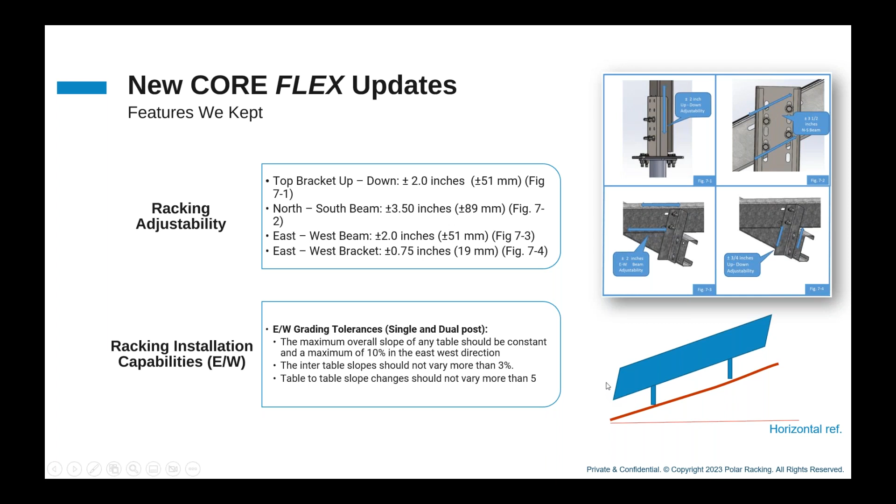Continuing with the features we keep from our system, leading edge tolerance. It's very important to understand that when we talk about leading edge tolerances, it's the average leading edge. We're not looking at the largest or the shortest distance to the ground, but an average throughout the table. And we maintain that tolerance plus or minus 100. The feedback is that that's plenty of adjustability as a tolerance on that feature.

Racking tilt, we're also keeping the traditional 30-degree tilt. The reason for this is very important: you have a steep enough angle that you can shed snow and minimize loading on your system and your foundation, but not so steep that you catch too much wind from the back or the front.

So it's a good compromise performance-wise for the latitude where we are. 30 degrees is very reasonable, and like I said before, a good balance between snow and wind, keeping the loads at a minimum.

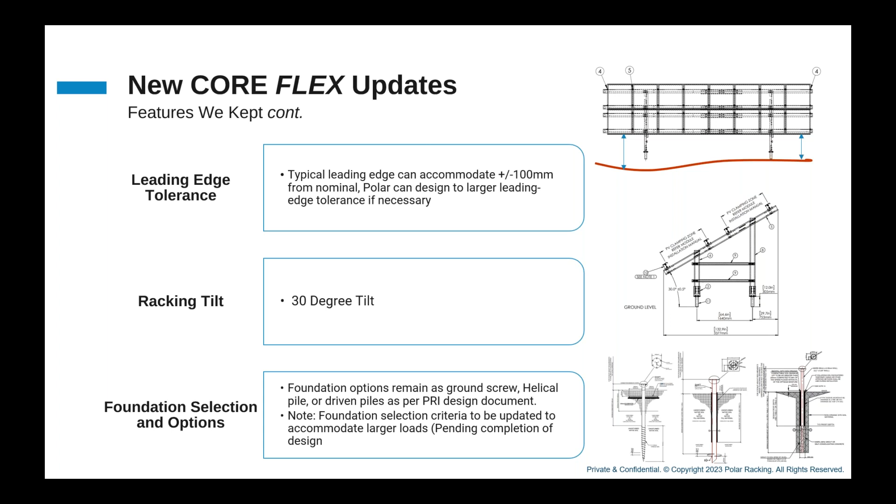Foundation selection. We'll dive in further later on, but basically we can tie to any type of foundation, which means we can work on any type of soil we encounter as we develop a project. Ground screw, helical pile, driven post, grouted post, that's all available, and we maintain the same range as we did before. Next one, please.

So here we're stepping into what's new. Those who have installed this system will probably recognize some of the feedback given to us that we incorporated here. The first change is a top clamp with integrated bonding and grounding. So there's no longer a need to handle that additional bonding washer, just attaching the clamp. It's rated and certified for that purpose, and certified with this system. So all your grounding is taken care of from the module point of view through that method.

Smaller splice bracket, that seems like a small change. But the previous version of the splice bracket was longer, more cumbersome. There was some feedback in terms of aligning during installation. So basically what we did here is adopted the bracket that we use on another product line or core line for utility mount system, utility scale.

You're still coming through muffled. Sorry, I don't know. I'm not sure why that is. Okay, let me see if I can reset my audio for a second. I'm gonna change the audio here.

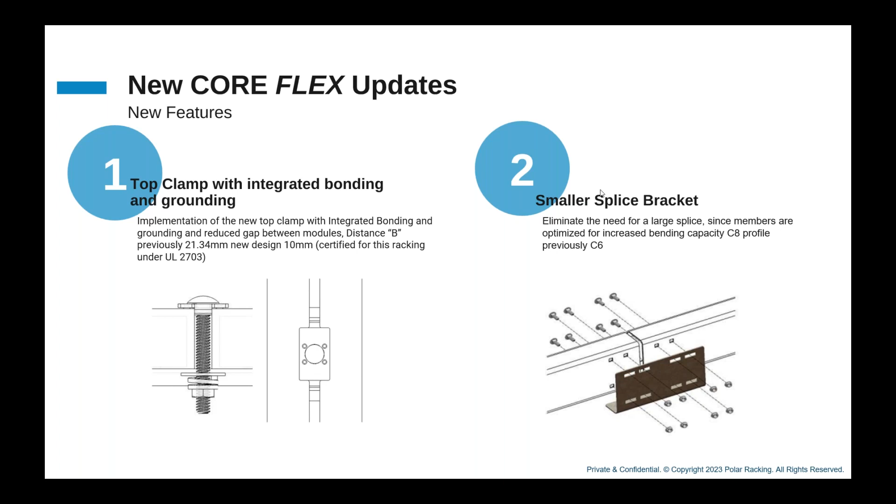Sorry guys, is the audio any better now? Much better? Yes. Okay, hopefully it'll stay good for the rest. Okay, so let's go for the next. Apologies for that, but if there's any further clarification, we can always go back and clarify if needed. Right, this is to continue.

I guess this is yet another very important point on the change, and has to do with module width and length, right? To take on the larger format modules. So for these, we're expanding the width to 1160, and on the other slide we can see the overall height for the module to 2600. So this will allow us to tackle all the new format 550, the 500 watt range modules.

For these, basically we did a bit of a study and looked at everything that we quoted in the last year and a half, with particular attention to all those larger formats. The most common is the 2.2 meters by 1.1 meter. So that's the number that repeats the most, and we certainly make sure that we can capture that.

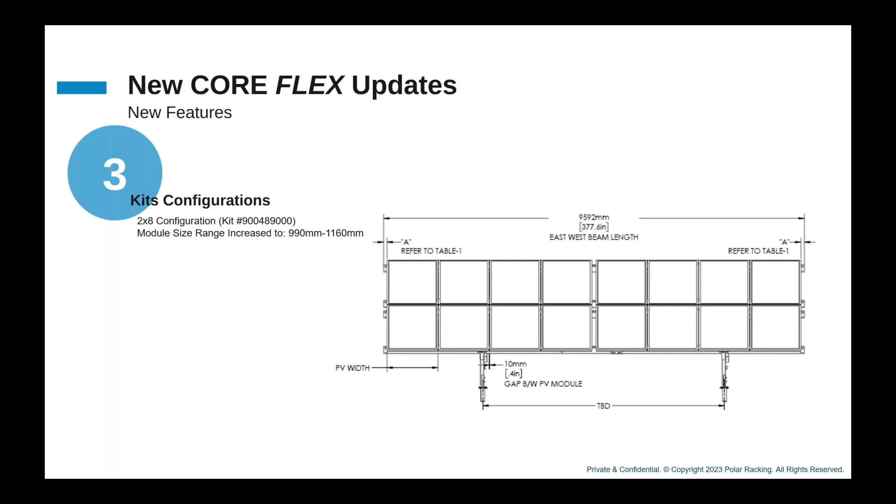There's a few odd module sizes way beyond these dimensions that we're not capturing here, because it's very small usage. I mean, we can count on the fingers of one hand how many jobs we've done with those extra large formats. There's some particular challenge on that in the industry. The normal trend is more towards the 2.2 meters by 1.1. So basically with that, we're ensuring that 80-90% of the modules available today on the market can fit on this product line. Next one over.

Yeah, so additionally, because of the larger formats, we have to increase adjustability features on our rails to account for distances in between modules, and also, very important, for the green zones for clamping on the modules. So on the north-south, we're adding additional adjustability, so you can adjust all your east-west to find a proper or approved range for module mounting. So you will not have issues with the module manufacturer warranty that way.

That's a very small feature, but very important. Like I said, when it comes to module warranty, you want to make sure that you're always in the green zone as per the module manufacturer. And the other new feature is going to be the single post conversion kit. Up until now, like 90% of our sales on this product line is dual post. Now we have a single post kit solution that we're going to launch with this new product.

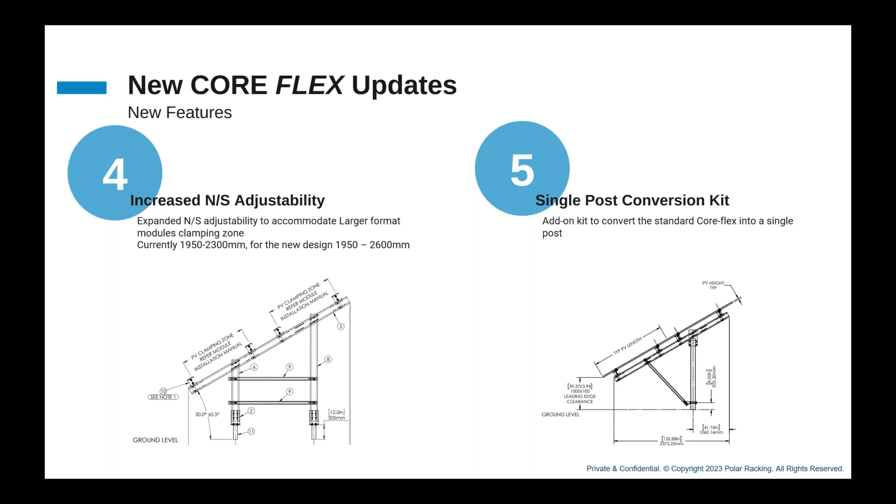So basically, your foundation extends above ground, typically a helical pile or a driven round post. There's some bracketry that connects to the top with braces, and the top table is the same. It's the exact same. You just replace the two legs with the single leg with the braces. Next one. I think at this point I'll hand it over to you again, Chris.

Sure. Guys, we have a couple of questions here, if that's okay. Yes. How big of screw pile posts will be needed for your 2x8 frames? In terms of diameter, we're typically looking at 5.5 inch diameter. And they're asking, will this support 550 watt modules? I believe that's a yes. 1134 by 2285. Absolutely, yes.

And when will the conversion kit be available? We're estimating to wrap everything on the engineering side by mid-April. So I would suppose that shortly after that we'll start the distribution. Great. And do these work with bifacial modules?

Yes, all our racking systems work with bifacial modules. It's important to note, obviously, as opposed to a tracker, there will always be some shading. The bifacial will really rely on diffuse light. So even though you have rails on the back, you don't have 100% exposure. You still have the benefit. You still get the gain of that bifacial module.

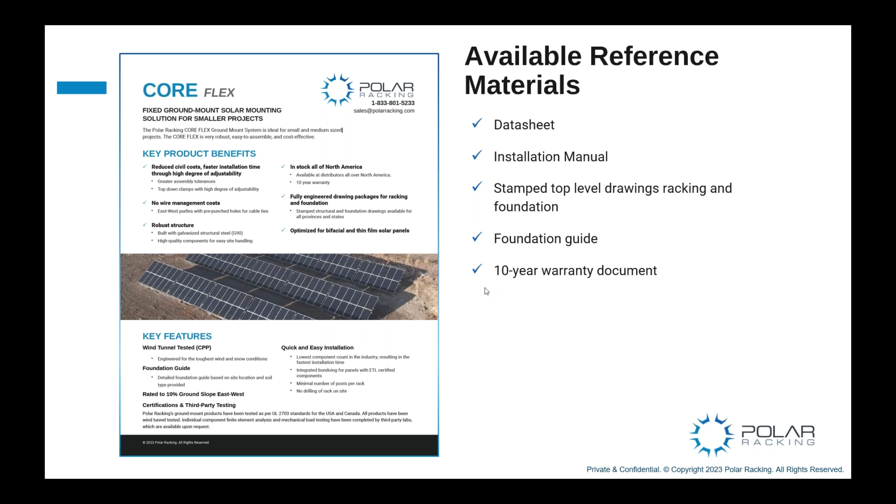I'll just continue on here. Here's some of our tech specs, just a quick run around. We have a 10-year warranty, not really inclusive of corrosion for saltwater environments, but nobody's is. There are things that we can do: for bigger sites, increase the galv thickness, and for smaller sites, just like Mariano said, you can fit it into your O&M schedule. This is all available through BayWa, myself, our website, whatever you need. So I'm not going to spend too much time repeating information that we can all read.

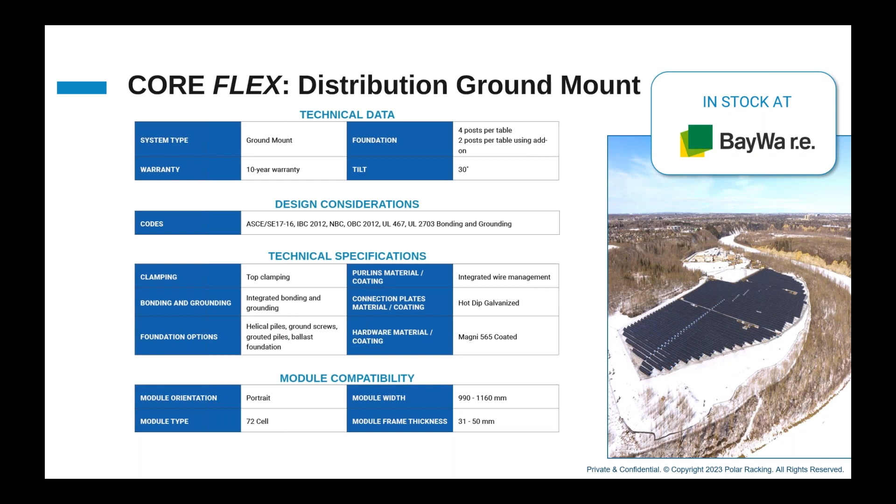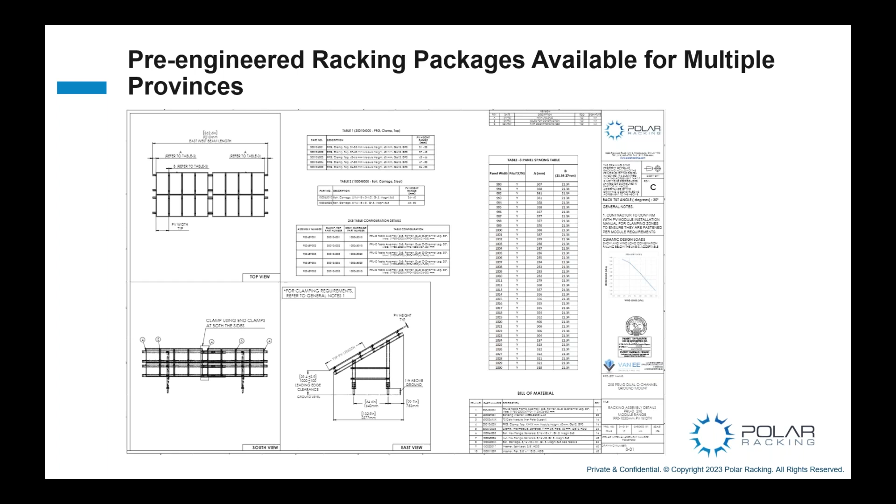This is just an example of what our pre-engineered drawings look like. These are readily available from anybody on this chat, and especially from your team members over at BayWa. So, a small overview just so you understand what we were talking about with the east-west beams, the brackets and clamps, the north-south beam, all of it. It's all there. It's pretty straightforward. There's not a whole lot to this.

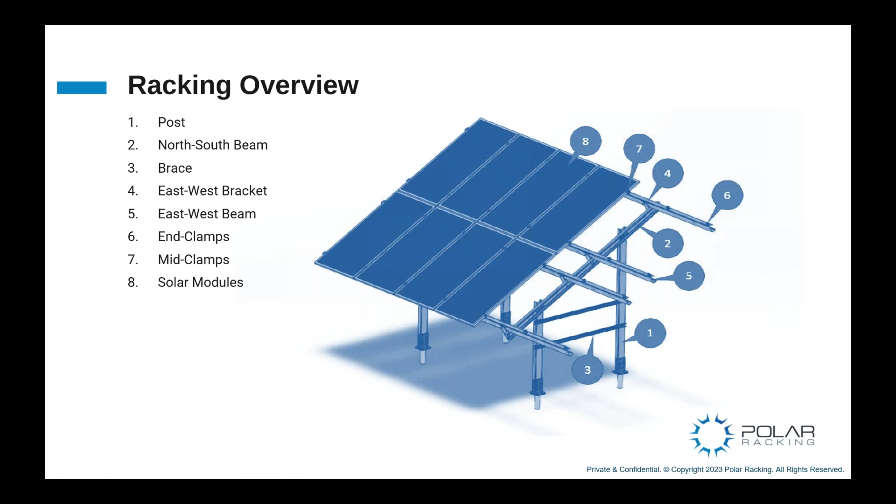Again, this is a very high quality system that doesn't require a lot of maintenance, is very strong, tried and tested, especially in Canada, all over the place, as well as in the upper northeast of the US and in the Caribbean. A ton of this in the Caribbean, which I am forever jealous that I'm not the sales guy for the Bahamas area.

Okay, foundation details. So here are some of the foundations that we have used in the past, that the engineering is available for, as well as the supply through BayWa and through Polar. A lot of this information coming up is going to be very heavy and way over my head as far as the actual math behind it. However, it's all taken care of in our foundation guide, which again, nobody else has. So that's an advantage. That's a big attaboy for Polar.

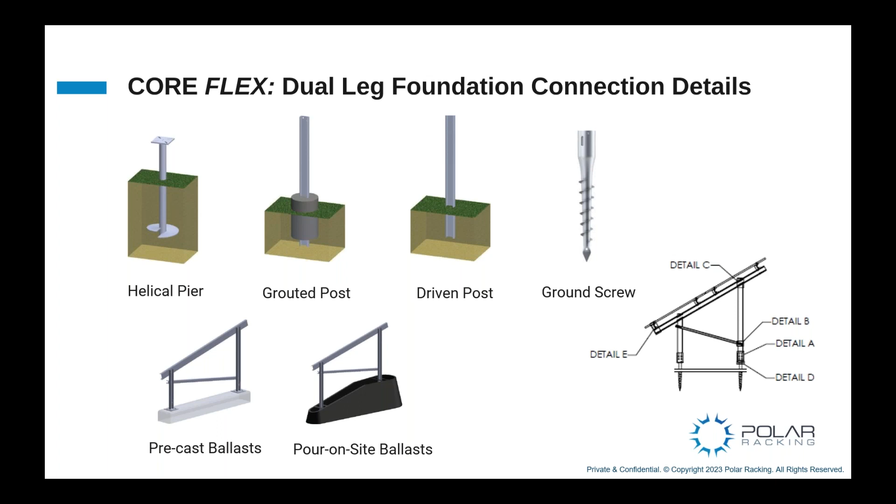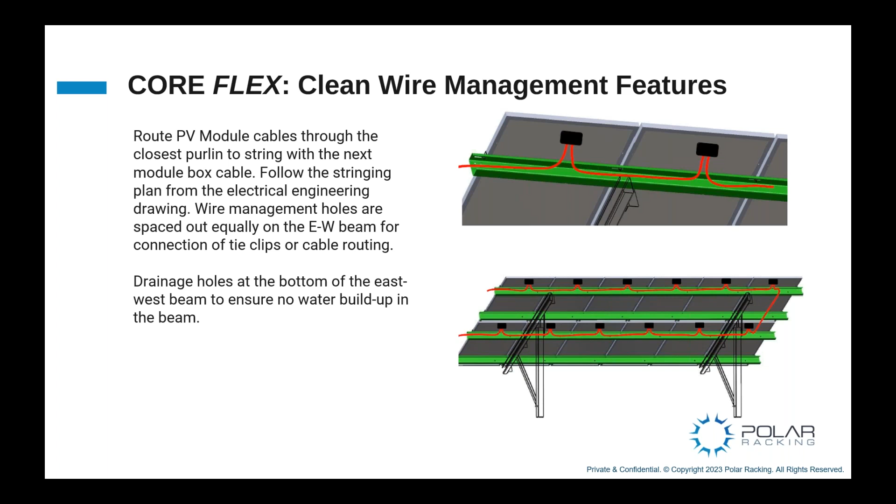We have a very easy and functional wire management system with holes in our purlins for cable ties, cable management, as well as drainage. So it's a pretty no-nonsense system. If the guy that you've asked to install this can't figure out the wire management features, then you should probably have a stern talk with him.

This is where we get into what would be the particulars in our foundation design manual. We take into consideration pretty much everything that you need to build an appropriate foundation for what you're doing. Everything from micropiles, helicals, ground screws, driven round, pour in place, ballasted, a whole bunch of other stuff. We include the snow and the wind loads,

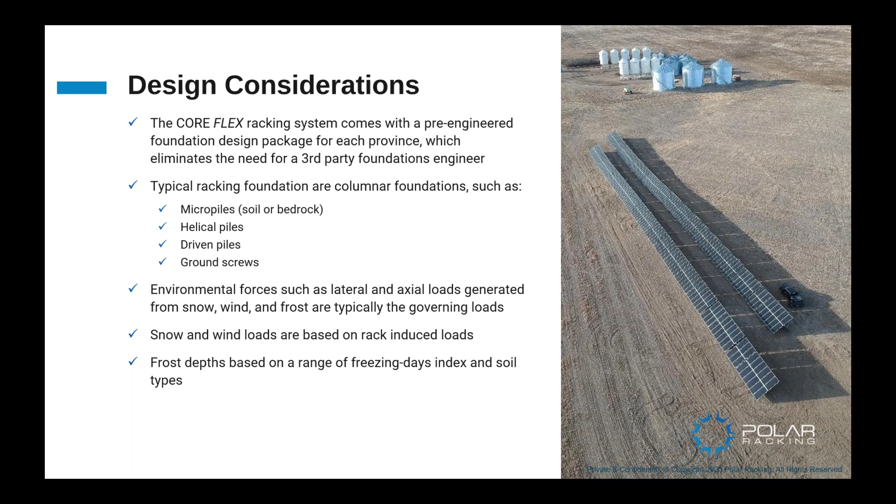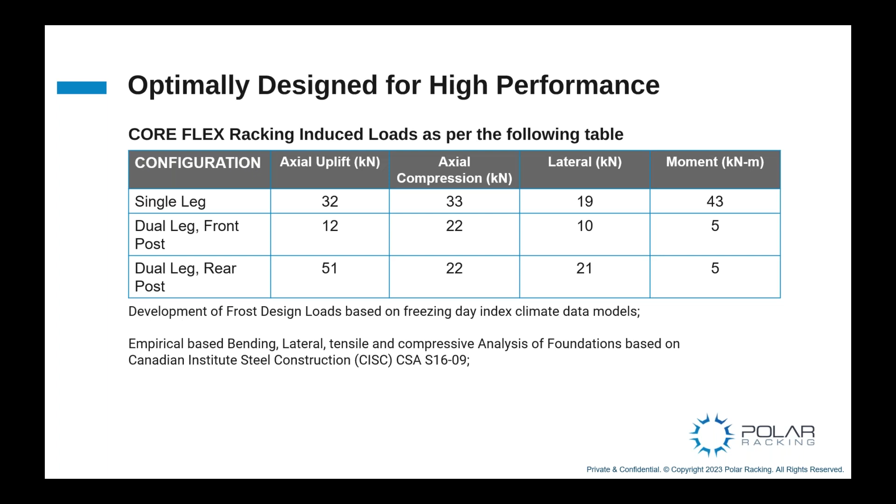and then the guide shows you how to determine the frost depth, which if you're not from Canada, or at least a small section of the northern United States, then you have no idea what it is, fortunately. Just a table full of math. All of this is in the guide, and all of this leads you to a very simple conclusion on what size of pile you require and what loads you're going to incur.

Pincher Creek, too windy. I went to school in Lethbridge. I had to deal with it. You come out of your house leaning one way or the other. So in Pincher Creek, it's too windy, combined with the amount of snow they get, for our racking.

There's not many places in Canada that you cannot use this racking. I would say probably 97% of areas in Canada are acceptable to use the Core Flex system. The remaining 3% cannot, and those can be covered by our Core fixed tilt system. Again, if this site is over 500 kilowatts.

All of this information is readily available. We pull this from the Alberta Building Code, and it's updated as often as the building codes are, so never. Just kidding. No, this is all based on the 2015 or 2019 building code for wherever your jurisdiction is.

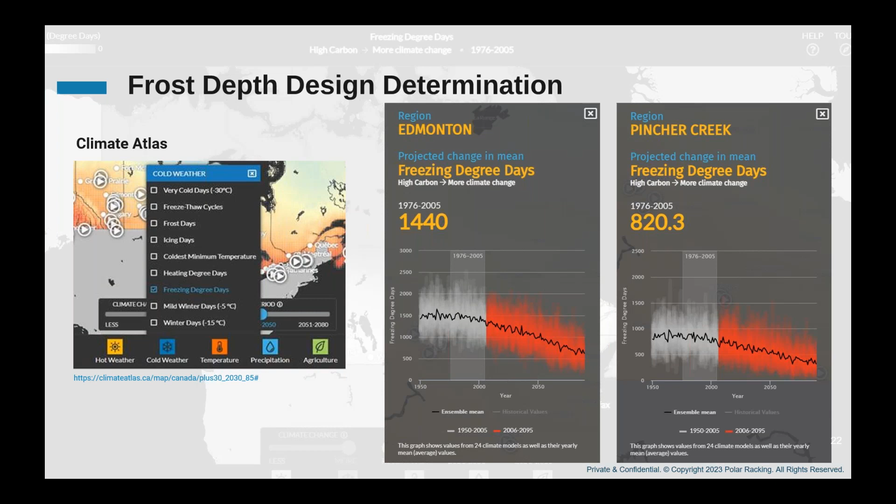Again, some site evaluation, all covered in the guide. I can't express this enough that I don't have the education to back this up, but the group who wrote the guide definitely do. So if there are any questions over and above what our foundation guide presents, and that BayWa can't answer and Polar can't answer, then we will defer you to PRI, our geotechnical engineering firm, and they can have a look at your site.

Obviously, if it's a special circumstance or something that isn't covered in a normal foundation scenario, then there will be some additional cost and testing that is required. But for most of the soil in Canada, we've either been there and done it or have the ability to engineer to it.

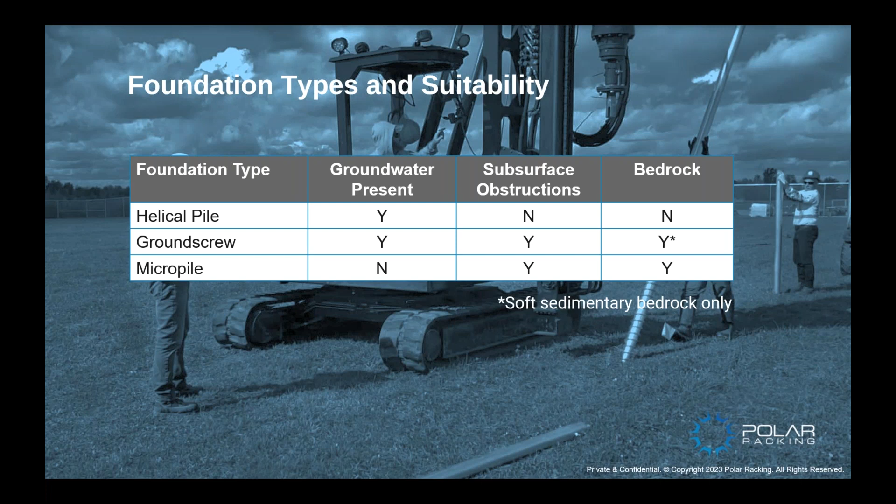Again, the ease of use of this, especially for various types of soil conditions in Canada, can't be understated. You have groundwater, yep, you got a couple options. You have bedrock, you got a couple options. You have obstructions, which is Southern Alberta, you have a couple options.

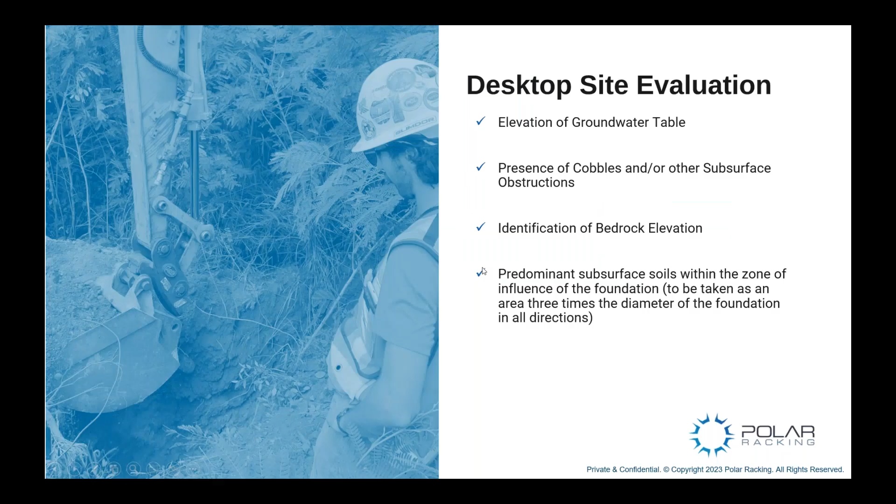Again, 90+% of Canadian locations will fit within these parameters. There's a handful, like we explained before, that are outside this area, very specific regions, and for those areas we can review on a job by job basis if needed.